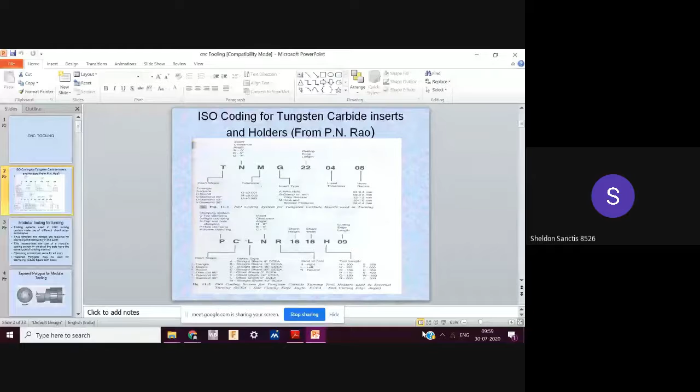So this is what we had done last time. Just have a look at this.

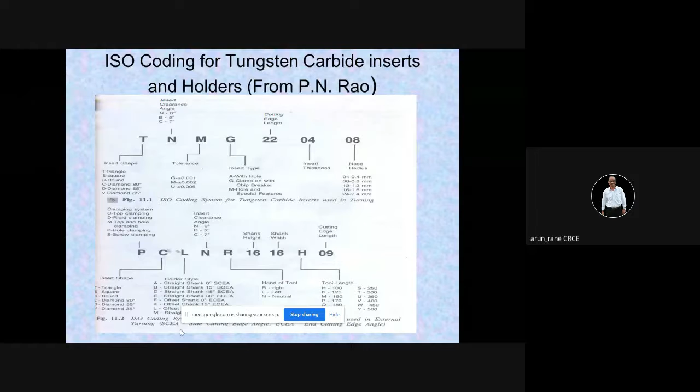Let me see how many of you have joined. 23. Only 23 have joined. Neeraj, where are the others? Sir, I don't know, only 23 have joined. I will wait for some more time.

Neeraj. Hello Neeraj. Yeah sir, I can hear you. Shrenik and Anuj and some other people are unable to join. Why? I don't know, sir. But there's our group and messages there over. Let me restart. People are joining.

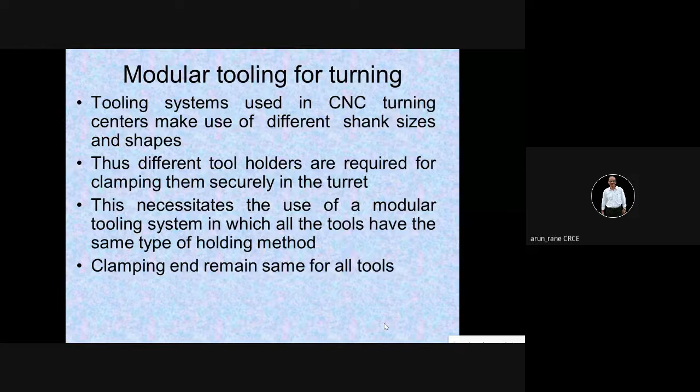So modular tooling means you can join tools one by one. That is what is called modular tooling. Like we have modular kitchen, modular beds, modular cupboards, same concept. So that is what is called modular tooling for turning.

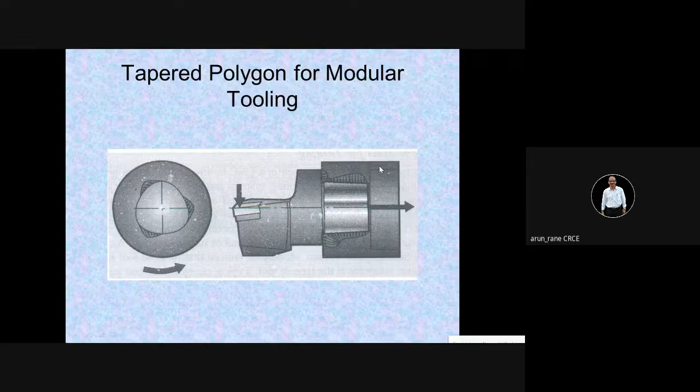Generally, the spindle taper is ISO 40 or ISO 50, or in terms of British standard, it is BT 40 or BT 50. Collet is used for holding the straight shank, which is at the end of the milling cutter.

This is how a typical tool will look like. This is the taper which sits inside your spindle, and here the tool changer grips while changing the tool.

So the automatic tool changer arm will come here, it will grip it here, then it will be pulled down, then it will be rotated or swung, then it will go to the pocket of the tool magazine, and the magazine will rotate, and the desired tool will come. Again that desired tool will be pulled, and the arm will swing again, will come to this position and insert. So this is how the cycle is for the tool changing.

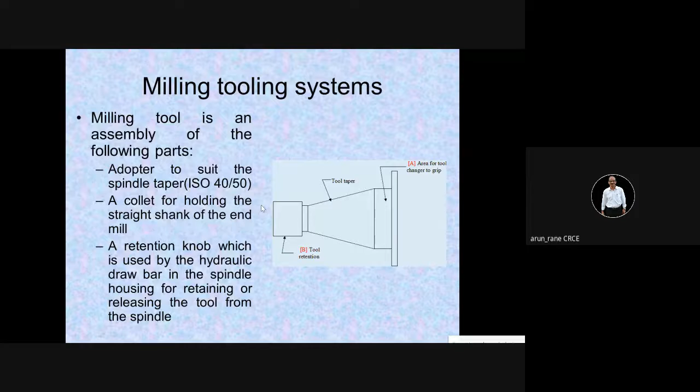And that is what is called the automatic tool changer. It is used for improving the productivity on the CNC machine.

Because suppose on a particular job you have to use say 25 tools, like milling, squaring operation, center drilling, then drilling, pilot drilling, reaming, and counter sinking. So suppose if you want to do 20 or 25 operations using 20 or 25 tools, manual tool changing will take time. If you have to do say 100 or 150 components, it will be time consuming. So that's why in mass production we go for automatic tool changer.

So sometimes they ask like this: explain automatic tool changer, or explain any one equipment which is used for improving the productivity on the CNC machine. At that time you can very well describe automatic tool changer, or you can describe automatic pallet changer also.

Automatic pallet changer means it is kind of a pallet where you can mount the workpiece offline. That is, while one piece is being machined on the CNC machine, offline you are also assembling another workpiece on a pallet. So once that component is done, the pallet is rotated, and the workpiece which was mounted offline goes inside, and the completed workpiece comes outside. So there is very little wastage of time. That is what is called the automatic pallet changer.

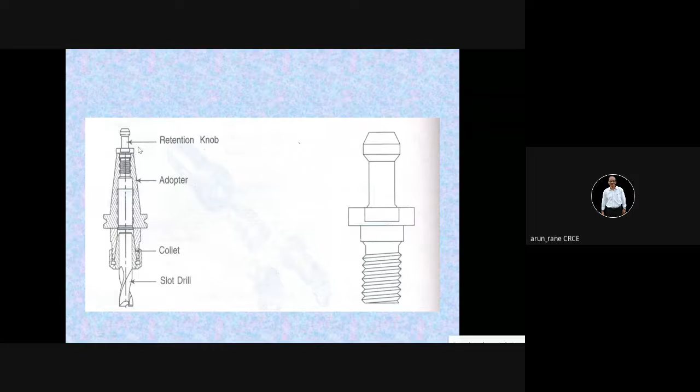Then tool presetting, that is again another equipment which is used for improving productivity on the machine. As I told last time, there is something called tool diameter compensation and tool length compensation. So if you try to do this tool diameter and tool length measurement on the machine, then your machine spindle running time is reduced, and the efficiency of the machine is reduced.

So as far as possible, you have to do this tool length measurement offline. Tool presetting is nothing but tool length measurement as well as tool diameter measurement, done offline on an equipment which is called the tool presetter. So you do the setting offline, not actually on the machine, so your machine running time increases. Then you simply insert the tool inside the tool magazine and it is ready for machining. So you have automatic tool changer, automatic pallet changer, adaptive control system, and tool presetter - these are the various devices used for improving productivity.

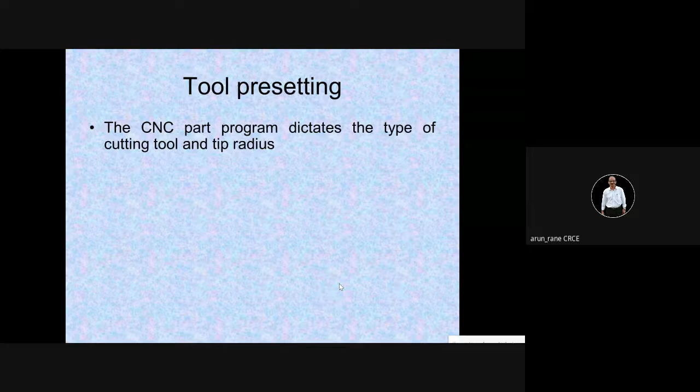In the tool presetter, we set the length as well as the diameter. Now you will ask me, is the diameter always fixed? What to adjust? But what I mean by diameter adjustment is applicable for boring bars. In a boring bar, you can set the size of the bore as per your requirement. Like suppose if you want to bore 25.8 or 25.9, then you can move the tool tip inside or outside. That is what is called the micro boring bar.

So if you are using a tool called the micro boring bar, there is a provision to move the tool tip in and out so that you can set exactly as per your desired bore. You have a dial which touches your tool tip, and you can move the tool tip in and out. On the dial, you are setting the size, let's say 26.8, and the moment the tip touches the dial and it comes to zero, that means your tool is set. This can be done offline, so that saves your machine downtime.

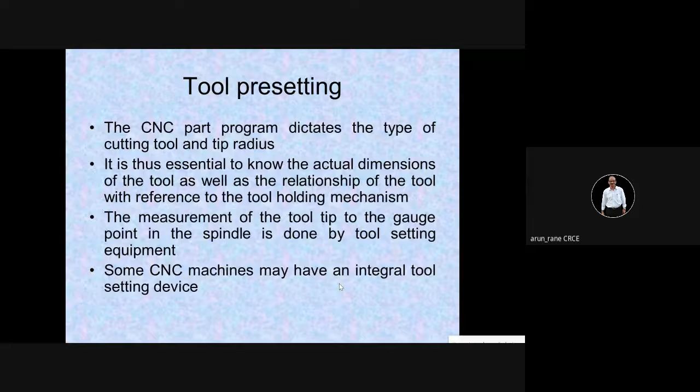On the tool presetter, remember you can do tool length adjustment as well as tool diameter adjustment. This tool diameter adjustment is only for the boring bar.

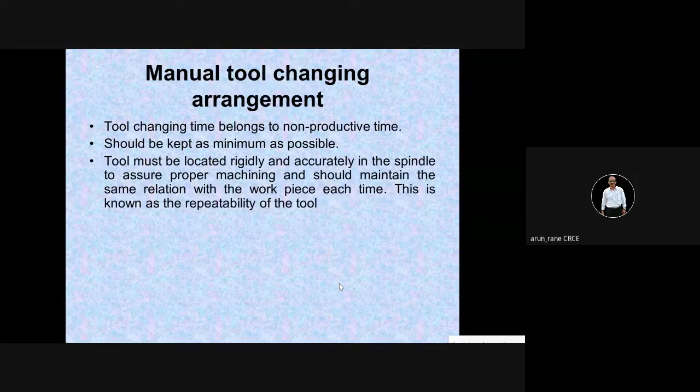Manual tool changing will take time, so it is applicable only where the cycle time is large, like machining of dies or molds. Dies and molds take a lot of time for machining, around 2 hours. Once you put one end mill or ball end mill, the cavity machining goes on, the profile is large and it continues for 2 to 3 hours. Sometimes for finished machining, the feed rate is very small and the depth of cut is also very small.

So in that case, finished machining we always carry out overnight, unmanned. The program is used, so it is transferred continuously to the machine from the computer, and the machining goes on. In such cases, you can go for manual tool changing.

So there will be a typical vertical milling machine, CNC vertical milling machine, without any tool changer, because once I put the tool, it is going to run for 2 or 3 hours. But whenever there is mass production, or many tools required for drilling different kinds of holes, wherever tool change is frequent, you must go for an automatic tool changer.

Suppose there are 20 tools to be used on one job, and one tool change takes half a minute. No matter how fast you work, it will take at least half a minute, because you have to remove the existing tool, keep it in a trolley, take the next tool which is ready, and insert it carefully into the spindle. You have to use hand gloves and cloth for handling the tools, otherwise the tools will cut your hands.

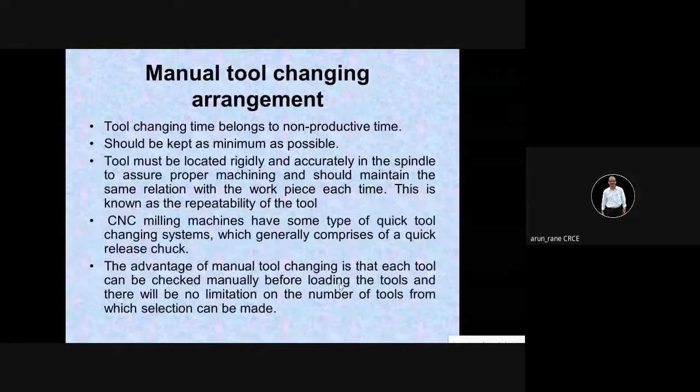In a machining center, this is applicable when there is mass production. There we fight for seconds, because the machining rates are very tight. So this is what your automatic tool changer is, used for mass production to improve productivity.

Tool engagement, disengagement, tool change, and tool setup are all automatic. You have seen this in the videos also, I will show that video again - the automatic tool changer, how it happens. So what are the requirements for the automatic tool changer?

First, a tool magazine for tools. Generally, tool magazines are available in the size range of 20 to 120 tools. But most of the time, a 40 tool magazine is sufficient to take care of any kind of jobs, instead of going for 60, 80 or 120.

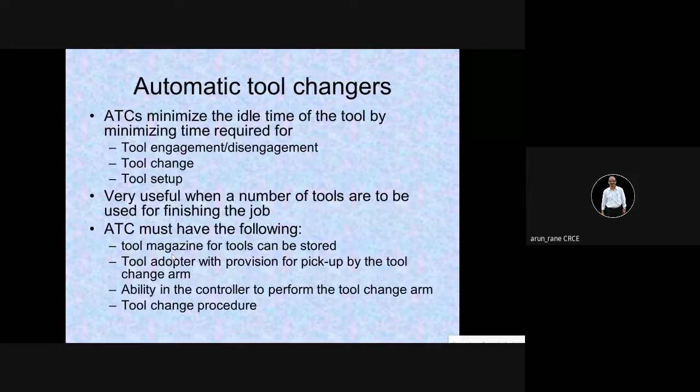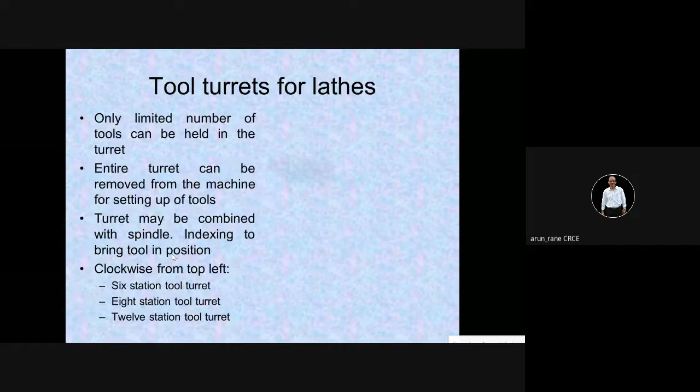Then on the lathes you have turrets, hexagonal turret or octagonal turret. In our college machine, we have an octagonal turret, where we can mount eight tools. Now here is a hexagonal turret - one, two, three, four, five, six - there are 6 tools mounted here.

Remember, I was talking about seconds. So when you talk about a 40 tool magazine, you also have to take care that indexing time is minimum. That's why there is a provision of bi-directional indexing.

For example, suppose this is tool number one, and next to it is tool number 39, in a 40 tool magazine. If the tool magazine rotates clockwise, the tool indexing will be very fast, since there is a difference of only one pocket - tool number 39 will come immediately. But if it rotates anti-clockwise, it goes through tool one, then second, third, fourth, fifth, sixth, and so on until all the tools are rotated to reach tool 39.

Won't indexing take a lot of time? That's why there is bidirectional indexing, which uses some kind of artificial intelligence to detect the nearest path. For example, with tool number 39, but what if there is tool number 35? Bidirectional indexing detects the nearest path, whether to rotate clockwise or anti-clockwise, and it always selects the shortest path accordingly.

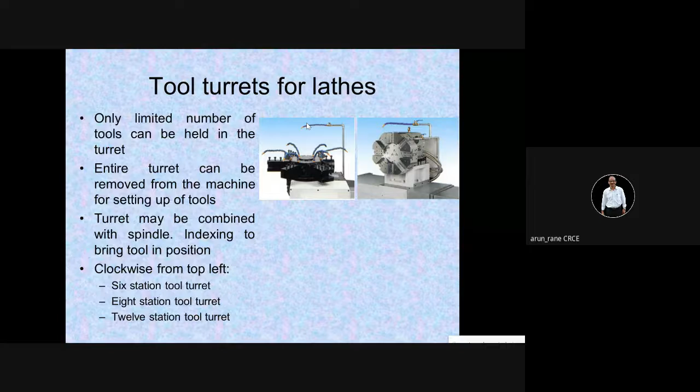This is what your turret will look like. This is exactly what we have. All these motions, the indexing motions, have been divided into small parts. How does the indexing happen? This is your turret, and you have a turret head.

The moment you give the tool change command, it's M06 and T02. M06 means tool change, and T02 is the tool number. So what happens whenever it reads the tool change command?

At that time, first the turret will move out like this, because it has been coupled. There is a coupling that rotates, with a hydraulic or mechanical motor. This has been meshed because it is rotating like this. When it rotates like this, that means there is some kind of a gear arrangement.

So this has been meshed, and first it has to be disengaged. Disengaging means the turret first moves out, maybe by 1 or 2 mm, just to disengage. Then it rotates till the desired tool comes here - this is the orientation position. Then it rotates, and after the desired tool arrives, it sits inside again, meaning it meshes with the gear once more. So these small movements can also be programmed individually.

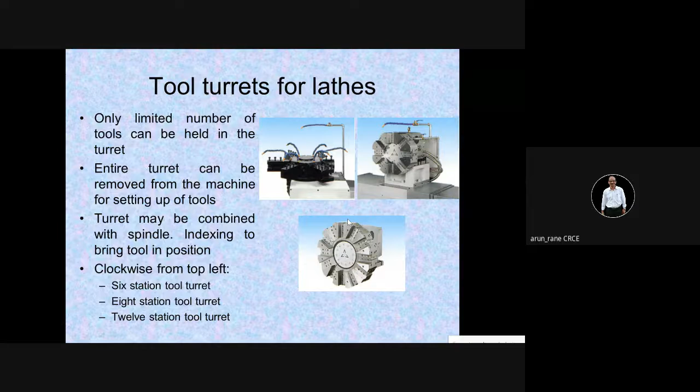But nowadays machines have built-in logic so that even if the power goes off, you don't have to do this manually. It automatically goes back to its position. Nowadays the logic is developed in such a way that there's no need for manual intervention - whatever the position may be, it senses and goes back to its correct position, retaining the last known state.

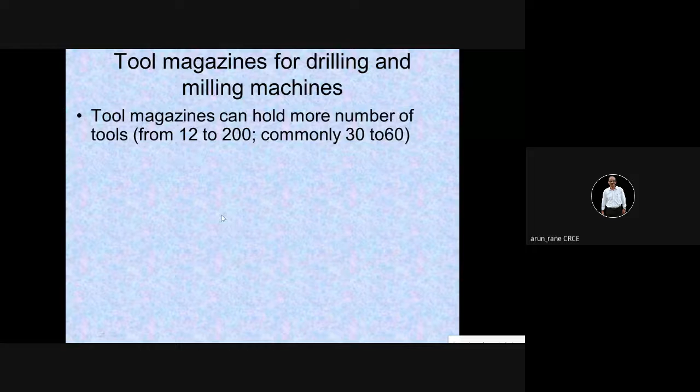Commonly, tool magazines have pockets ranging from 30 to 60, but they can go as high as 120, with 40 being the most common tool magazine size. But if you go for an 80 or 120 tool magazine, the machine becomes unnecessarily larger because it occupies more space and more power, and that many tools - 60 or 80 - are usually not required.

Even sometimes some machines have 200 tools, a 200 tool magazine. In such a case, this 200 tool magazine may accommodate the entire store's tools. So there is no need to have a separate store. This can be called a store mounted on the machine itself, or a tool crib mounted on the machine itself. So no need to have a separate store.

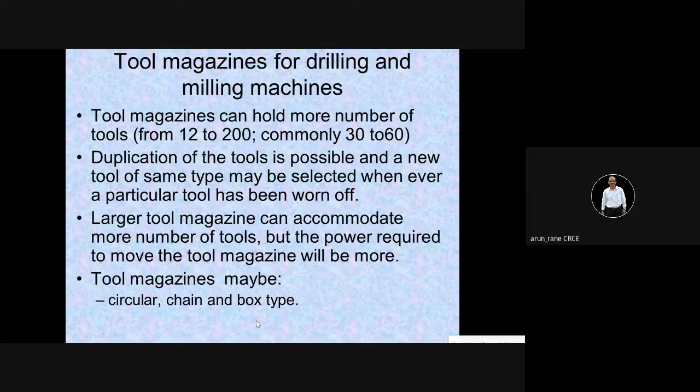Generally, the cutting tool store is called the tool crib. CRIB. C for Calcutta, R, I, and B. And tool magazines can be circular in shape, then chain type, and it can be box type also.

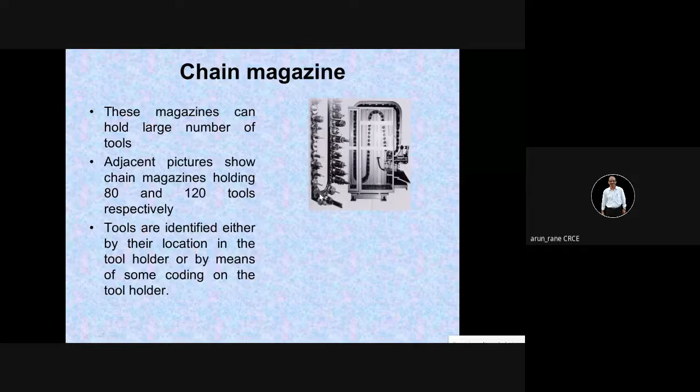How will a chain magazine look like? This is how a chain magazine works - a chain is used for rotating this tool magazine. This is your tool magazine, in which the tools are inserted into pockets. All this can be done offline. The tools are rotated, and whenever the desired tool comes, it picks up that tool. This huge tool magazine holds 80 tools.

So many tools can be mounted, and of course there is a large inventory. When you're talking about such a huge inventory, you are investing a lot on the machine.

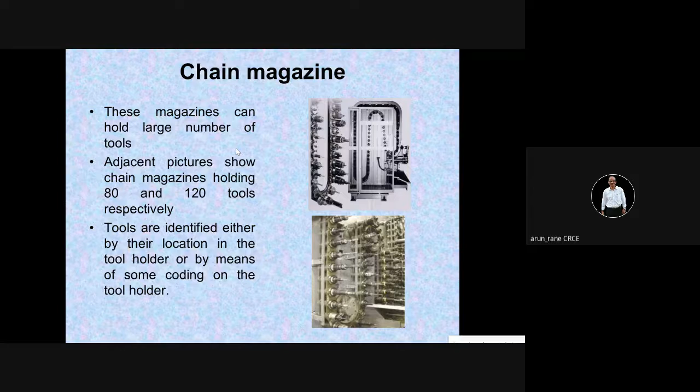One tool holder will not cost you less than 6,000 or 7,000 rupees. So if we have even 10 tools, that will come to 60,000. And if you are talking about 100 tools, that will be 6 lakhs investment. So you have to have a trade-off. You cannot say, 'I have already invested 20 lakhs in a CNC machine tool, so now I cannot invest on tools.' No, you must invest at least 5%, because without tools you cannot exploit or utilize your CNC machine. Tools has to be there. Simply buying a CNC machine is not going to give you returns.

So circular magazine - the earlier one was a rectangular kind. This is a circular magazine. Circular magazines have limited capacity, around 30 tools it can hold. Again, you have bidirectional indexing. This is how a typical circular tool magazine will look like.

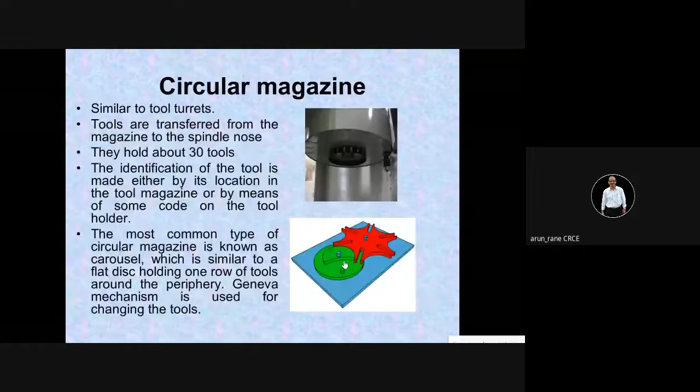Going a bit fast. So if it is a turret lathe, you just have to index the turret. If it is a tool magazine having say 20 tools or 60 tools, then you have to use the tool changer arm.

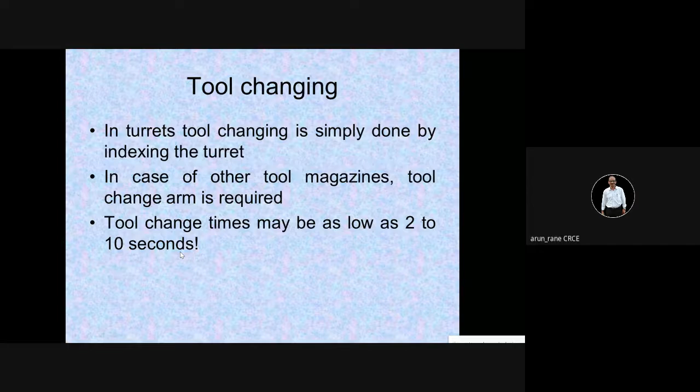So you have to minimize the tool change time. As I told you, it should be as less as possible. Generally it is 2 seconds to 10 seconds, depending upon the position of the tool which is called in the program, where the tool is. These are the different motions.

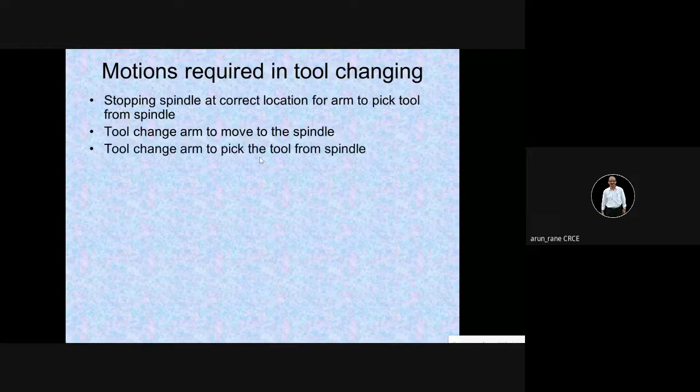You have to stop the spindle first, then your arm moves to the spindle and picks up the tool from the spindle. Then the tool change arm reaches the tool magazine, and the tool magazine indexes into position. Remember, every movement is programmed - there is a code for each and every movement. Remember, there is only one single code for tool changing, that is M06, whether it is lathe or milling. Everywhere M06 means tool change, but that M06 is again divided into so many codes - for the tool change arm to move to the spindle, there is one code.

For this also there is an M code. Earlier we used this code for cases of power fluctuation, where the machine stops at that position. Like if the arm is changing and power has gone, the arm remains there. In such cases, earlier we used to remember all these codes, which was very difficult. But nowadays it is not required. It remembers, and whenever the power resumes, the cycle goes on. You don't have to use a single code for this.

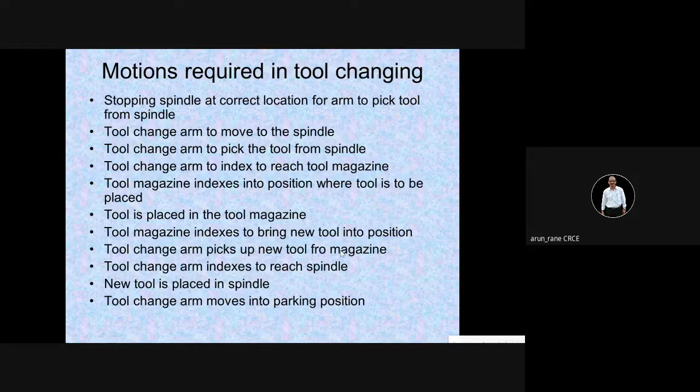Then the tool is placed in the tool magazine, and the tool magazine indexes to bring a new tool into position. Then the tool change arm picks up the new tool from the magazine, and the tool change arm indexes to reach the spindle. The new tool which has been picked up by the arm is placed in the spindle, and then the tool change arm moves back to its parking position, where it was residing.

This is what your tool change arm motions look like. Different motions.

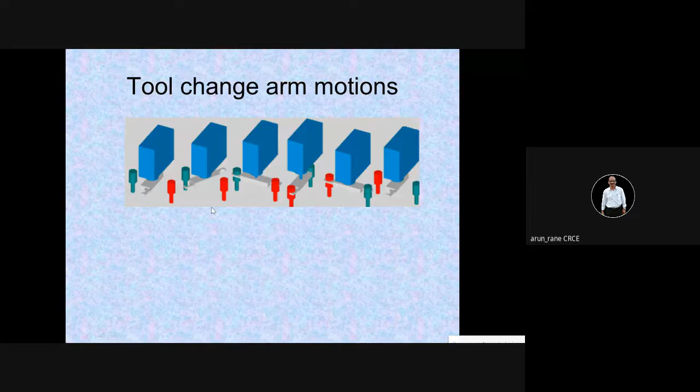This is a circular magazine. At one place it is being removed, then this rotates, then this is inserted inside, and one is inserted in the tool magazine and the other is inserted into the spindle.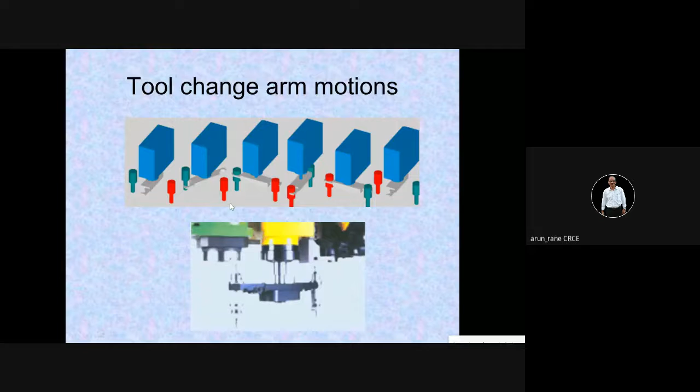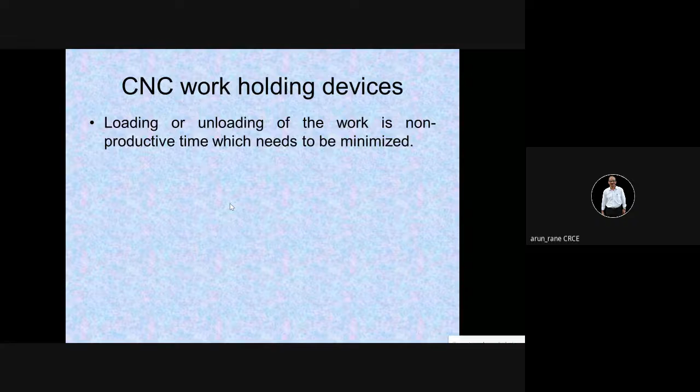That is, various devices which are used for improving the productivity of CNC machines, the CNC work holding devices. Without these devices and gadgets, you cannot get returns. So you should have a trade-off on how much to invest on the tools and how much to invest on work holding.

Like tomorrow, suppose an order comes and the customer wants M18 tap done on the component. If you say I don't have M18 tap, you cannot tell the customer that. Yes, you have to invest, but you have to see how much return you are going to get. If it is just one job, and the M18 tap is going to cost you say 10,000 rupees for CNC, you will definitely think whether you are going to reuse that M18 tap in future, because generally M18 tap is not common. In that case you can either regret the order, or request the customer to share some cost so you can think of buying it. Otherwise it is not economical for me to buy it.

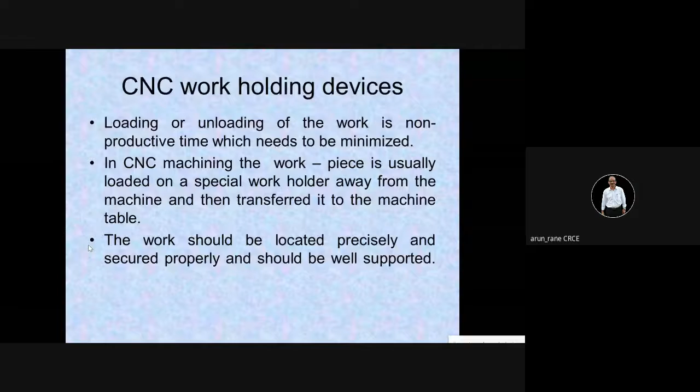Similarly, you have work holding devices for the turning center, the turning center work holding method. These are all devices which reduce your time. Like in our case, we have a CNC lathe where both hands are free to hold the job and insert it inside the machine.

So automatic jaw and chuck clamping. In our case, the jaws and chuck clamping is automatic. You don't have to use a chuck key, because on CNC machines if you're using a chuck key and doing manual clamping, it is not advisable. You cannot spend 2 minutes simply for clamping. Idle time you have to decrease.

NVA means non-value addition time. When you have indexing chucks, sometimes that is a 2-chuck machine or 3-chuck machine. I have shown you the video where it had 2 chucks facing each other.

In pneumatic or magnetic chucks, you have automatic chucks with soft jaws. So here the chucks are readily available with the soft jaw, so you don't have to even interchange the jaws. You simply change the chuck automatically, one chuck with the hard jaw, one chuck with the soft jaw.

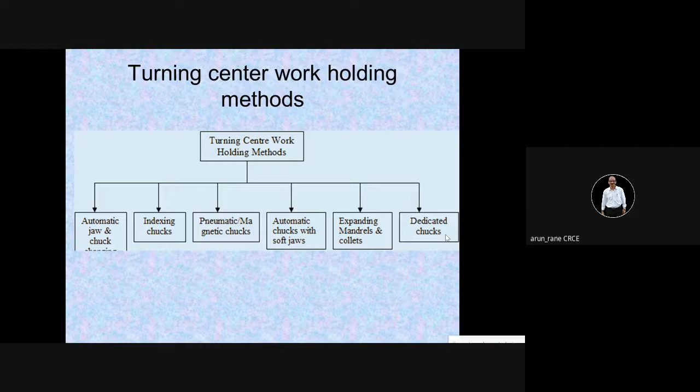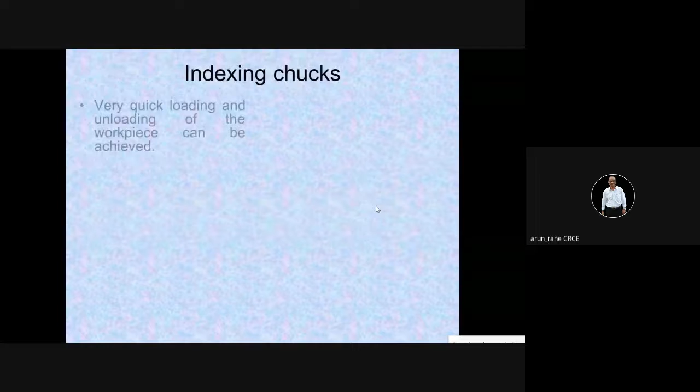You may not know that you have a chuck with only 2 jaws. You know chucks with 4 jaws, chucks with 3 jaws, but there are chucks having only 2 jaws. This is what an indexing chuck looks like, and these are the features of the indexing chuck. Just have a look at how the indexing chuck looks.

So you have quick loading and unloading, and a wide range of workpiece can be loaded here. Wide range means from minimum closing to maximum closing. This particular chuck can hold right from 10 mm to 150 mm. That is what is called the wide range.

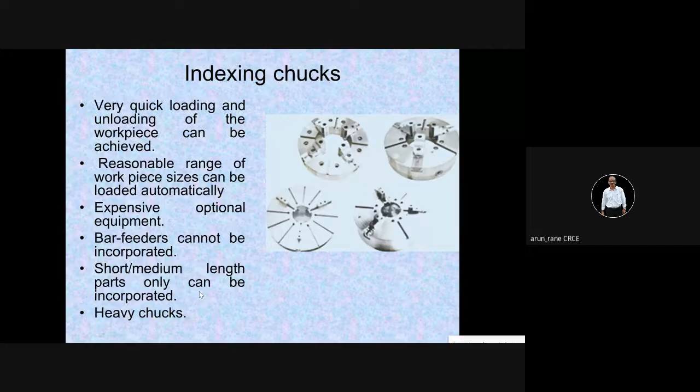Bar feeders cannot be incorporated. Bar feeder means you are using long bars. Only short, medium length bars can be used. Basically, these are heavy.

Again, some more devices to improve productivity: we have expanding mandrels and collets. Expanding mandrel means, suppose you have a workpiece with a bore of say 20, or sometimes 20.1 or 20.2. You cannot go on using separate mandrels for 20, 20.1, 20.2 - that will be very expensive. So in that case you go for expanding mandrel. It will take care of a span right from 20 to 21, or 20 to 22, or 20 to 25 mm, expanding accordingly. So the number of mandrels needed is saved.

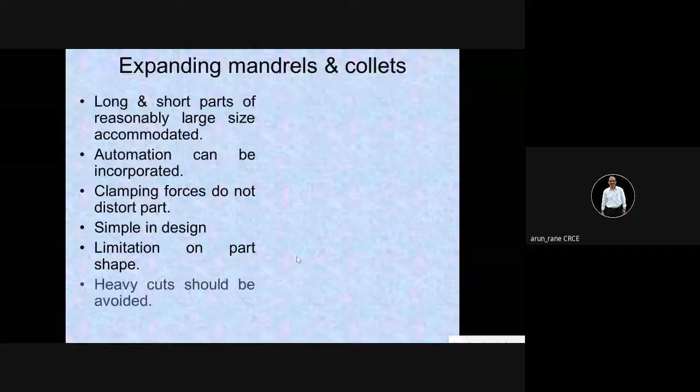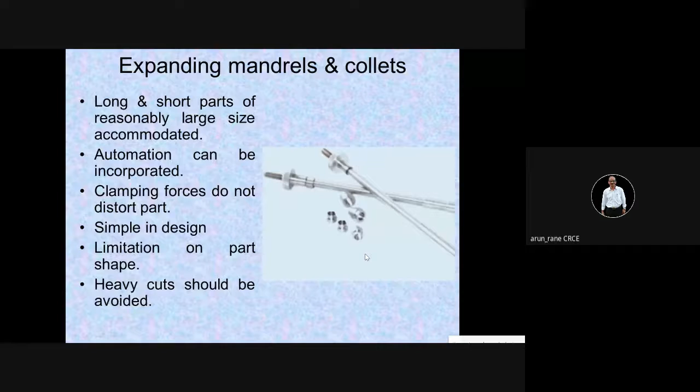Whereas an expanding mandrel can take care of up to 5 mm variation. These are the mandrels, expanding mandrels. How does the expansion take place? Because of the slits which are cut in the collets, and in the mandrel, and also because of the material properties. These are made out of spring steel, so it has a springing action. That is EN47, the material used for this.

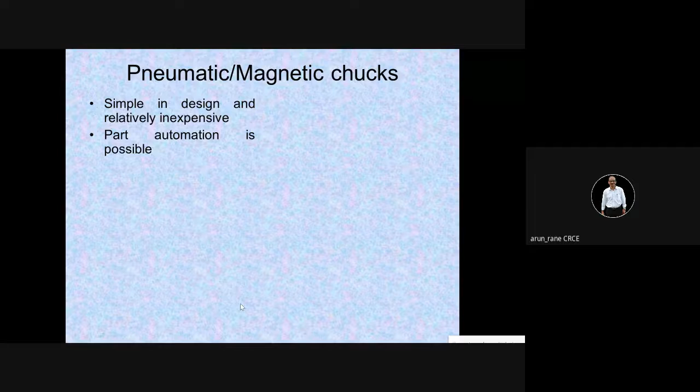Then you have pneumatic and magnetic chucks. Our CNC lathe's chuck is hydraulic. Hydraulic chuck gives a large clamping force, unlike air clamping. Normally, most CNC chucks are hydraulic chucks.

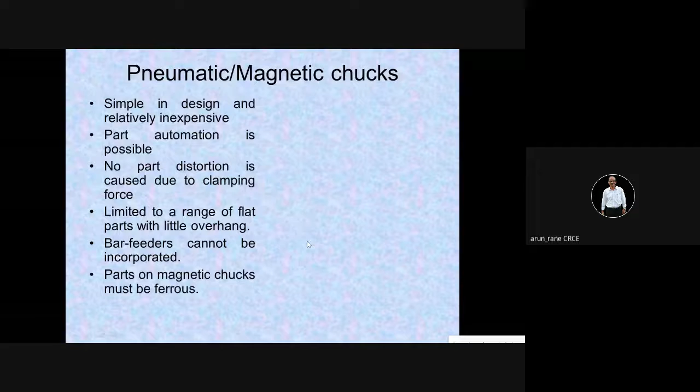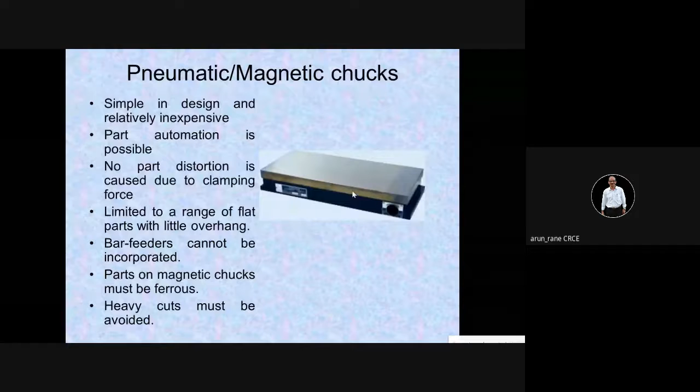Then magnetic chucks will not damage the workpiece. So wherever possible, you go for magnetic chuck. But the gripping is less - if you give more depth of cut, the workpiece may fly off. You have to be very careful with magnetic chucks. No matter how strong the magnet is, a small jerk can throw out the piece, which will cause an accident.

So in order to reduce machining time, you have another feature - automatic jaw and chuck changing, which I told you about. So this is the kind of automation.

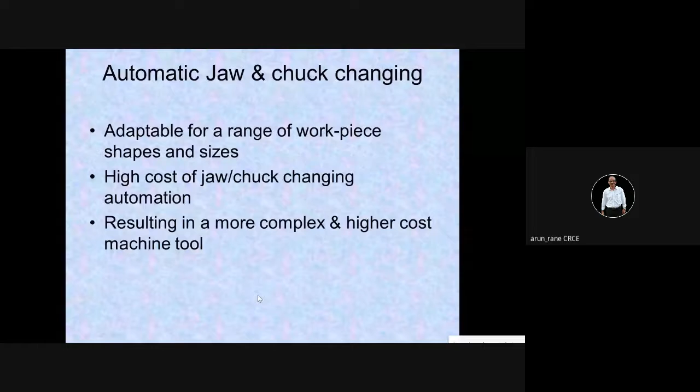Again, you have to have a trade-off. It's not really necessary, but if you have mass production and you are talking about seconds, then you can definitely think of it, because that will pay off. As I've told you, some CNC machines cost 5,000 or 6,000 rupees per hour. So even considering 6,000 rupees per hour, divided by 60, that's 100 rupees per minute - nearly 1.5 to 1.8 rupees per second. If you are saving 1 minute, you are saving 100 rupees for the company.

So wherever it is required, you go for automatic chucks - you have to justify it. You can go for dedicated chucks also. Dedicated chucks means for a particular type of component only, generally for irregular shaped components, and these are tailor made. You have to get it from outside as per your component or workpiece shape. That's why it is called dedicated chucks.

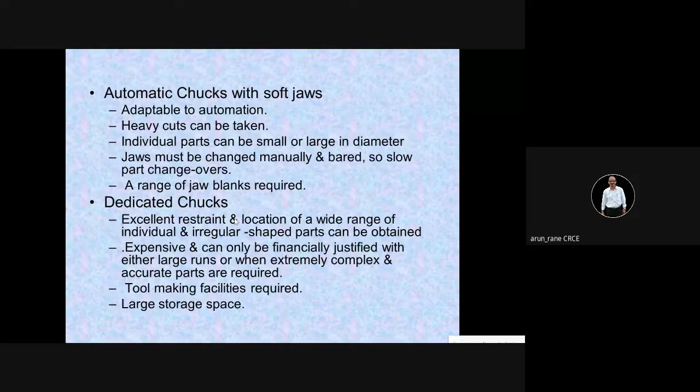You know very well hard jaw and soft jaw. Hard jaw is used for rough workpieces, it gives more clamping hold. Generally on castings and forgings the surface is rough, and in those cases we use hard jaw. Soft jaw is used on already machined workpieces, where comparatively you have less force. So with soft jaw, if you increase the depth of cut, the workpiece may fly off and an accident can occur.

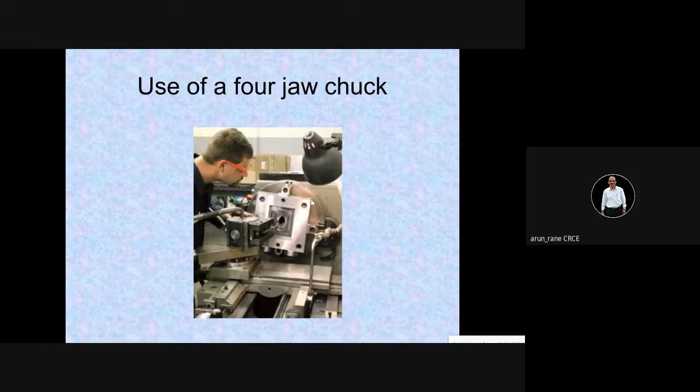You have work holding for the machining centers. As I told you, you have modular fixtures which you can go on building. You have automatic vice, universal vice, pneumatic and magnetic work holding devices, and you can have dedicated jigs also.

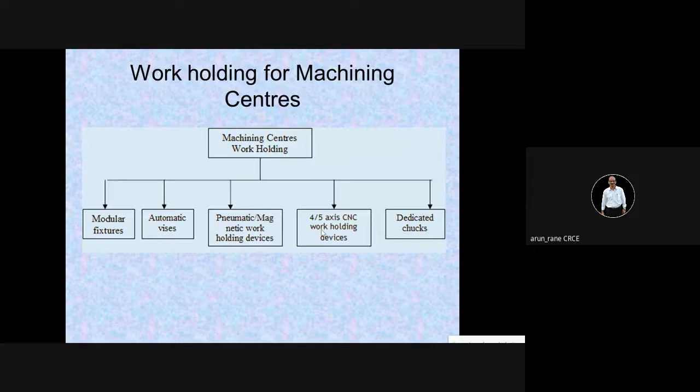4 to 5 axis CNC work holding devices mean what? We have a rotary table, and the rotary table can rotate about 2 axes, not 1 axis. I am talking about 2 axes rotary table. Then modular fixtures.

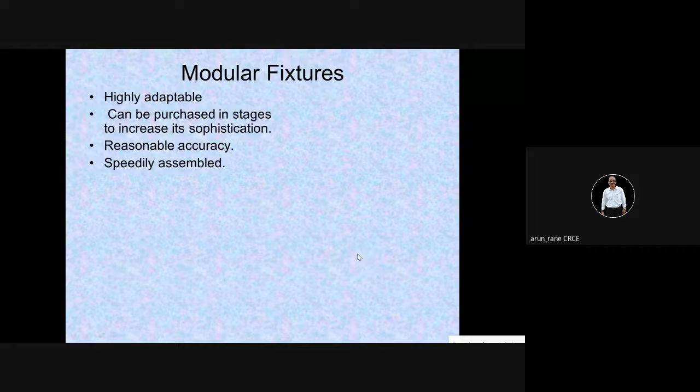It can be purchased in stages. This is the biggest advantage of modular fixtures. Accuracy is reasonable, but this is one limitation of the modular fixture. If you are talking about say 10 microns or 20 microns, you cannot get that.

Because modular fixture means what? You have to remove something, you have to add something. So you are making it in pieces. Whenever you are making it in pieces, understand the cumulative accuracy - it will not be 10 microns, 20 microns, because you are inserting the parts, part by part, building up. So even if you talk about 10 micron accuracy in every part, over 10 parts in modular fixtures, overall it will be 100 microns.

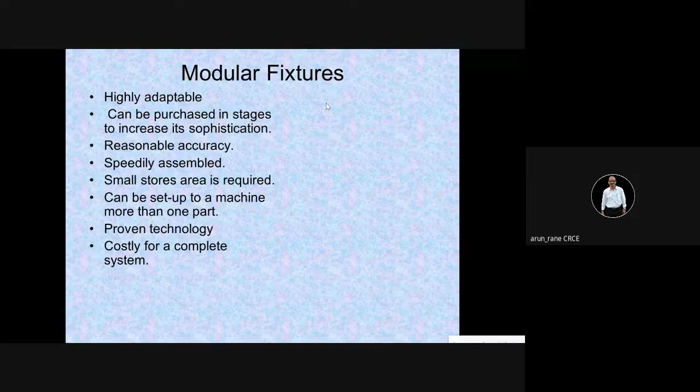So if you want good accuracy of 10 micron, 20 micron, you have to have a dedicated tool for that particular operation. That's why sometimes, wherever accuracy matters more, we go for dedicated boring bars - one boring bar only for 26.8, another only for 28.9, like that. But then in that case you have to have 10 boring bars, you have to machine 10 bores.

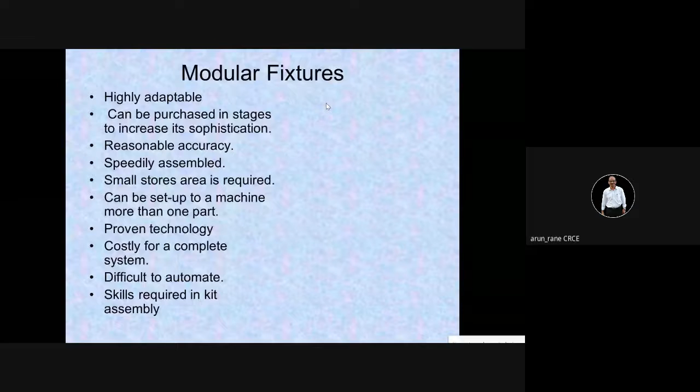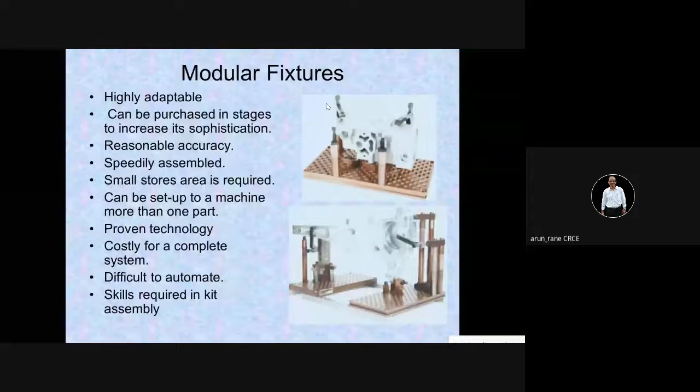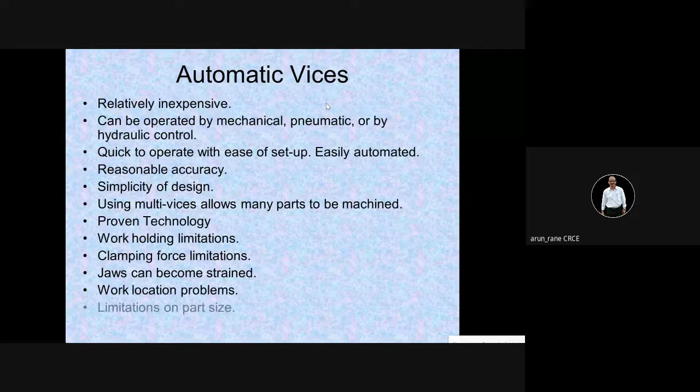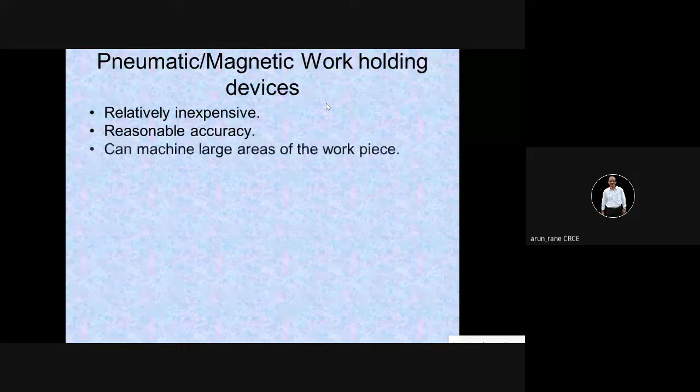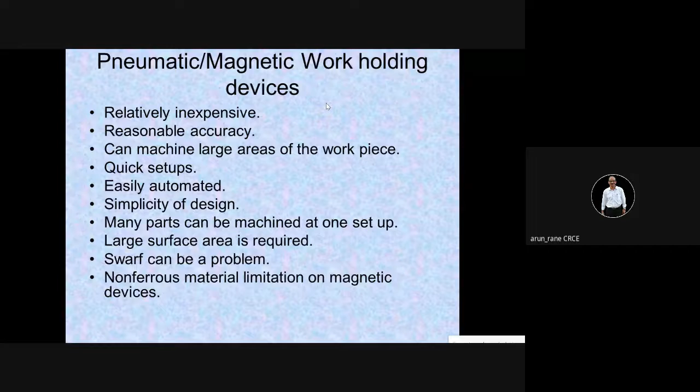So all this we are doing just to reduce the machining time. Again, your magnetic devices are not so expensive, so you can definitely invest in this. Accuracy is reasonable in case of pneumatic and magnetic. Overall, this kind of device can give you around 30-40 micron accuracy very easily. When you are talking about 1 micron, 5 micron or 10 micron accuracy, then we have to think of special kind of toolings - at that time this may not be useful.

So 4 to 5 axis CNC work holding devices, as I told, can be swiveled around different axes, so any complex geometry can be produced. This is what is called one hit machining. One hit machining means in one setting only you are completing the workpiece.

That's why we go for 4 to 5 axis machining, that's why we go for turn mills, that's why we go for twin spindle machining - all these are just for one hit machining. One hit machining means in one setup only you are finishing. The raw material just enters and it is finished, so there is no work in process inventory. WIP is nil.

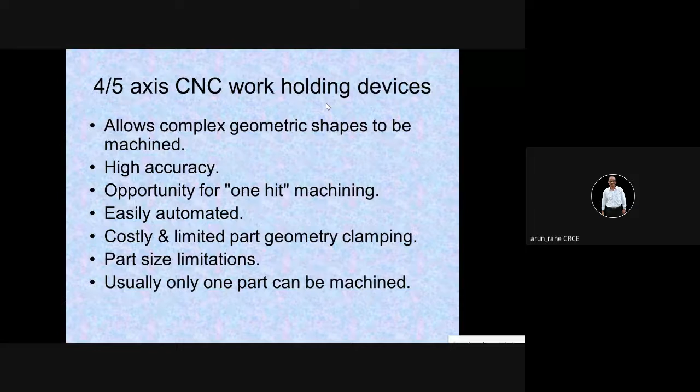So this is what we are talking about - zero inventory. Procure the raw material whenever you want to load. The raw material has just come, and you will straight away mount it on the CNC machine, finish it, and give it to the customer.

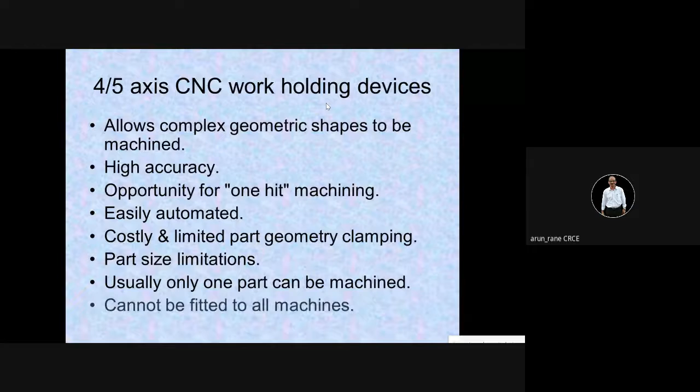Of course, practically it doesn't work like this. There are many difficulties - it is not possible. The logistics has to be very good, and supply should be very good, otherwise it cannot function.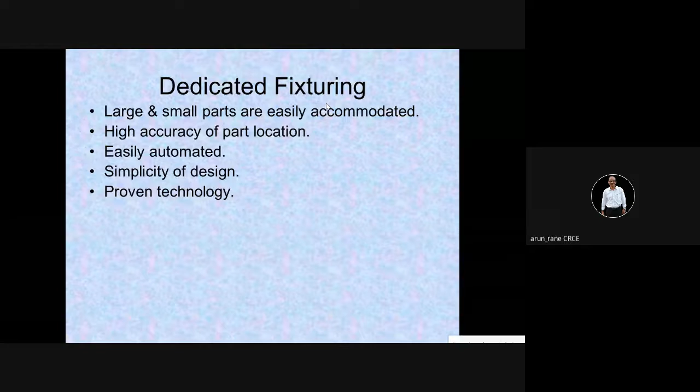Practically, it cannot function, but theoretically, yes. Maybe in other countries some plants do work like this. Some plants really have zero inventory.

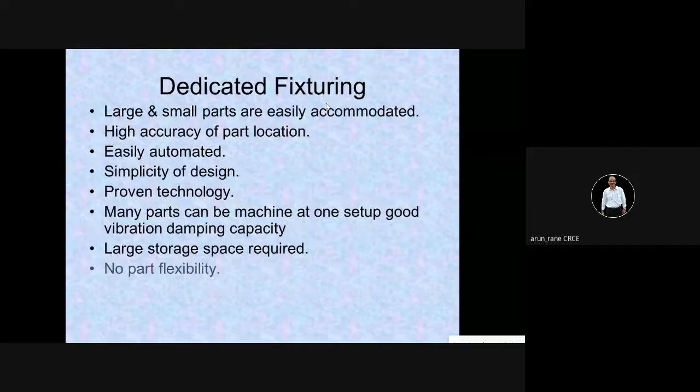I was talking about dedicated fixturing. Dedicated fixturing means, suppose if you want to do 5 bores, then you need to keep 5 boring bars. So investment in tools as well as space. It takes space also, isn't it? Nowadays, space is also important.

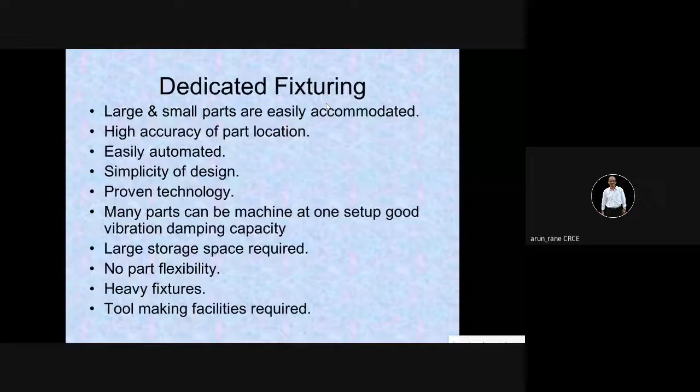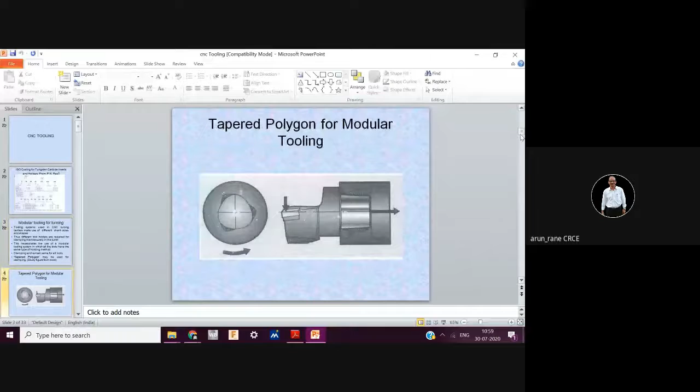So this was your CNC tooling, and from the examination point of view, what is important is the first slide, that is this tool nomenclature. Very important - one question, 5 marks. Another question, either explain automatic tool changer, automatic pallet changer, or explain the devices which can be useful for improving productivity on the machines. So you can expect around 5 to 10 marks weightage for this.

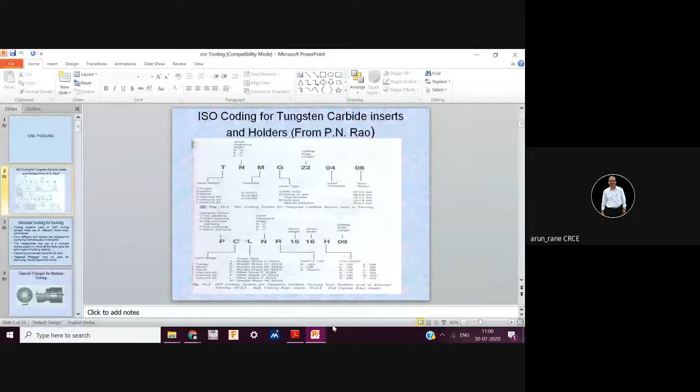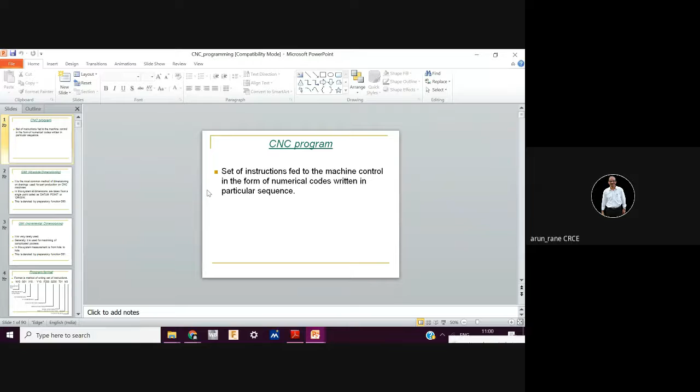Next time we will start with CNC programming. In the classwork I have already uploaded CNC tooling - you can read it whenever you get time. Now, if you have any doubts, please ask.

I hope you have logged in properly, especially that Aditya, because there are 5 Adityas. Let me check how many Adityas are there. Otherwise it's very difficult to identify, and then I am making injustice if I don't know whom to mark present. There is one Aditya Punjabi, and Aditya Sawant - so here it is clear, the attendance can be marked. Similarly Raj - there are two Raj, and similarly Yash also. Any Yash today? Yash Kamble. Yeah, okay, fine.